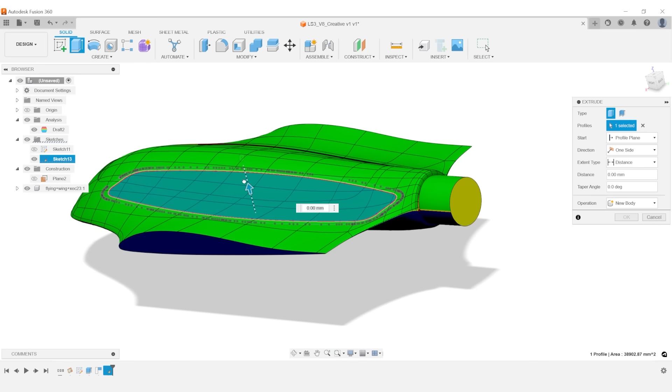Today, we're moving away from our normal hands-on approach to focus on design, specifically on how to design in the necessary features into your patterns to go on to produce molds for successful composite parts. By the end of this video, you're going to have a good understanding of trim allowance, mold flanges and returns, where to locate parting lines, and how to add in other features such as integrating mold clamping bushes in multi-piece

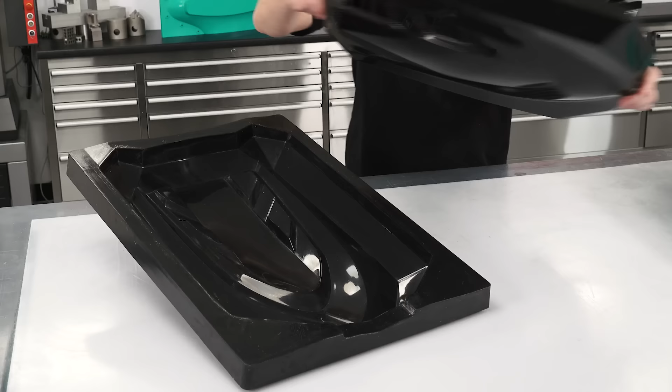molds. Before we jump onto the computer though, let's go over some of the fundamentals to make sure that we're all on the same page. So let's say that this carbon fibre engine cover is the final part that you want to create. In order to make this, you're going to need a mould. This is the mould for the part, and as you can see, if we drop that in, this component has been formed in this mould.

Now, in order to make the mould, we essentially need another mould, and that's what we've got here. This is the pattern. This has been CNC machined from epoxy model board, and if I loosely drop the component over the top of this, you see we've got exactly the same shape, but we have a lot of additional material and features, and it's the design of these features that will be the focus of this video.

We have these blanked off areas where we've got apertures. This would be the same if these were drilled holes, and then if you look around the perimeter, we do have a slight extension that runs all the way around the outside. This is what's known as trim allowance. It simply allows you to mold the component oversized and gives you the room to accurately trim it down to final dimension. Beyond the trim allowance, we have the mold flange.

This is there to stiffen the mold and also means that any excess material will easily release from it. And then in the case of this mold, we've also got an optional return as well, and this just further stiffens the mold up. So that about covers all of the features that you're likely to see in a simple one-piece mold. We will be looking at much more complicated split molds shortly, but before that, let's jump onto the computer and design in some of these features.

This video is not intended as a CAD modelling tutorial, and so it does assume that you've got some prior CAD experience. If you haven't, then there is loads of information out there to get you started. The software I'm going to be using is Fusion 360. The sole reason for this is I know that this is the package that a lot of you out there are already using and already familiar with. But as I'm only going to be using very generic tools and methods, everything you see me doing would be applicable to any engineering CAD software, whether that's Catia, Solidworks, Onshape, anything like that.

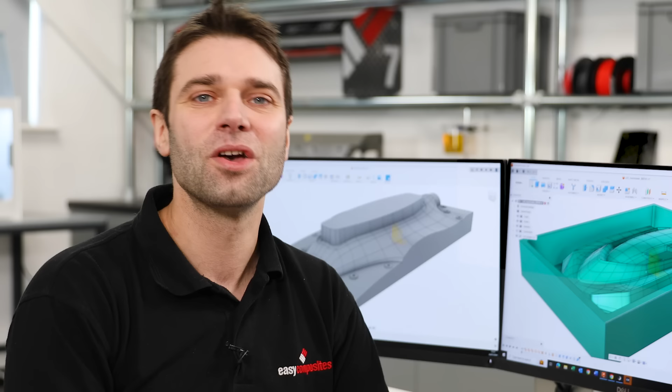One more thing that's worth mentioning is that some CAD packages will have inbuilt functionality or extensions for mold design. Now these are primarily going to be targeted at injection mold tooling, and so they don't really translate that well to pattern making in composites. But if you do have access to them, by all means experiment with the functionality, as sometimes you will find that they'll offer shortcuts into things like defining your parting lines. More often than not though, I find myself manually designing these elements in anyway. So let's get started and open up our file.

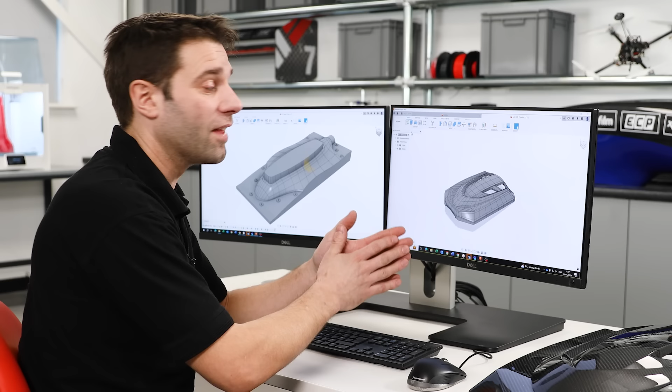So the file type that I'm opening up here is a step file. That's quite typical of the sort of file that you would be sent by a customer. But of course, if you've modeled it natively in the software, then obviously work from that fully featured model. So this is the model of the engine cover. The thing that I want to do now is establish whether this is going to release effectively from a mold. So we're going to consider the draft angle. In composites, any draft angle over 2 degrees is not going to cause any problems to release at all. Now, for small areas, you can go steeper than this, almost down to 0 degrees, particularly on like the edge of a tube molding.

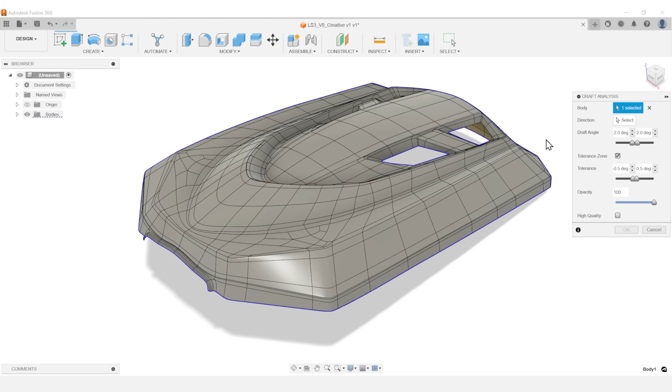So what we'll do now is go on the Inspect tab, select Draft Analysis, select our body, and then choose the direction that we will be pulling the part out in. So we're going to select the Z plane here, as that's the direction that we'll be likely pulling. So to get our draft angle set here, we're going to set 2 degrees and 2 in the draft angle. Then we're going to have a tolerance of 0.5 and 0.5.

And what this is going to do is highlight any areas that are less than 0.5 in red. They're likely to be problematic areas. Any areas that are less than ideal in yellow, and then any areas that are perfectly fine in green. Now we can't really see much on this because this model actually has very generous draft.

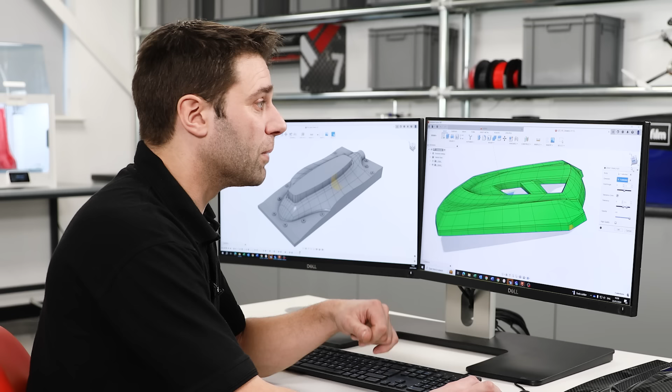You'll see a small area of yellow just in this area here, and that might be down to the orientation of the model. But if we were to change the direction of pull to, say, the side one here, not that we would ever try and pull it out of the mold there, you can see more clearly what that would look like. So we'll now set that direction back onto our Z-axis and click OK. Our draft analysis is still in place here.

We've got those small problematic areas at the side, but if we just take a side view, we can see that this model has quite a steep angle to it, and we can level this out, and this is going to do two things. One is it's likely to fix that small area of draft that we've got there, and the second thing is that it's going to use less material in the pattern, so we're going to just flatten that out.

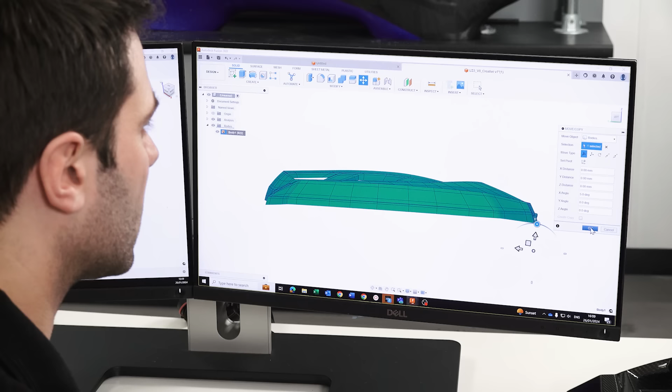So we'll just select the body and move that round, just setting the angle round to bring it in level. 5 degrees, if I just cheat and use the bottom edge, that looks about right to me and approximately level, so we'll just click OK on that. And then if we now just pan around the model, we can see that we've now got no undercuts showing on that draft analysis.

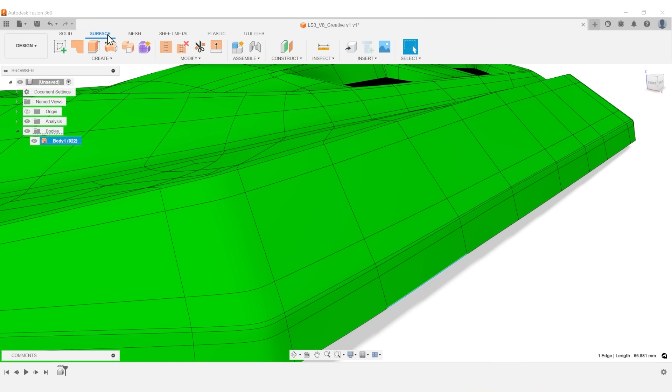With everything set up, we can now go on and model in our first feature. That's going to be the trim allowance, or the extension that runs all the way around the perimeter of the part. So I'll just move in here and select one of these edges, and then in the surface tools I'm going to create a ruled edge. On the edges that I've got selected, I'll just select 2 or 3 of those, and then change the type to direction, and then set the direction as the Z plane, so they're just drawing straight down.

In terms of the length of this extension, for pre-pregs this could be really anywhere between 3 and 10 millimeters. But for hand layup or resin infusion molds, you might want this to be quite significantly larger. So I'll just set that to -4 millimeters, and then I also want to add in a draft angle.

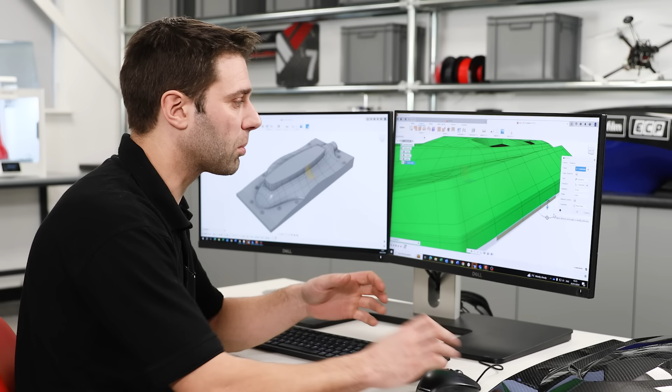I'm going to put in a draft angle of about -5 degrees here, and that's just going to kick those flanges out, which means that they won't have a problem. Otherwise, if we just drew them straight down, we would have parallel sides, which we know would be a problem for release. So I'll now continue on and just select all of the edges on one side of the component. I only need to model these on one side as this part has symmetry, and so I can save a little time by mirroring these features over later.

With the trim allowance modelled in, we can now move on and put the flanges onto the mould. Now for a pre-preg mould, these flanges can be just 50 millimeters around the perimeter, but for a resin infusion, this could be 100 or maybe even 150 millimeters to allow you the room for your sealant tape and vacuum bagging consumables. To model these in, we're going to create another ruled edge.

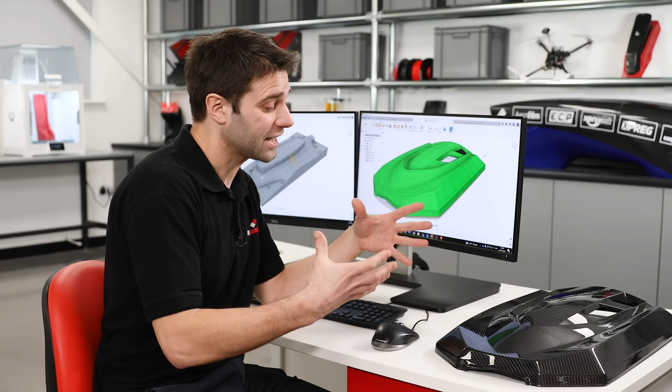And the first thing you need to do is determine what you see as the side of a component. And in this case, I'm going to be running this full length of the part and draw my flange out from there, and then I'll select this area as the front, and likewise the same thing at the back. So I've selected all of the edges down that side, and then we're going to create another ruled edge.

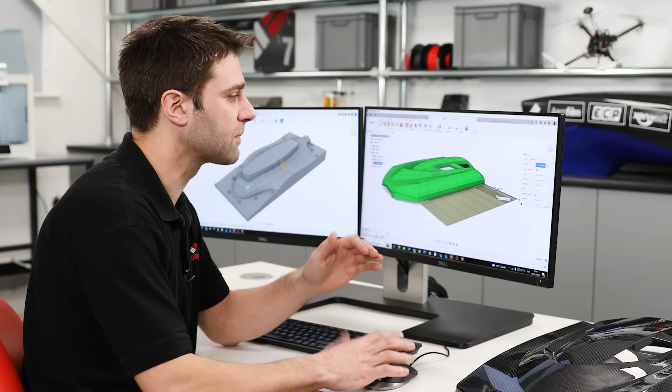And this time we're going to set our direction to the x-axis, and we've got 0 degree angle because these want to be coming out completely parallel. So in terms of the extension distance, 200 millimeters is more than enough. You can't do these too big at this stage because we are going to trim them back to size later. So oversizing them generally will be advantageous. So we're now going to continue and do the front and back.

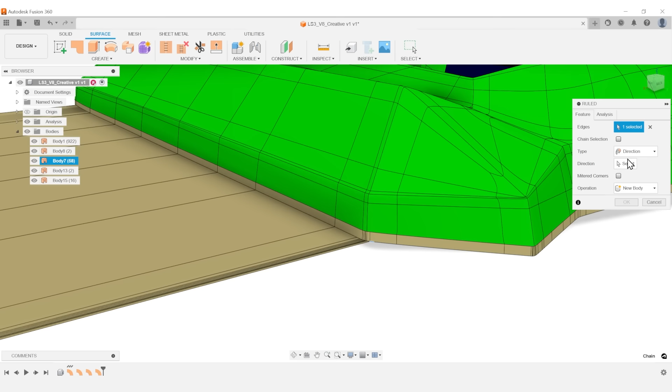So on the rear here, if we just go in and select an edge right next to it, it's very important that you do come right to that corner to meet the other side. So with those edges selected, we're going to create another ruled edge, and this time the direction is going to be the y-axis. And you can see that now that's extended, we've got the back of the part coming straight out from the back here. So I'll continue on and just get all of these edges selected. And then finally, we're just going to do exactly the same thing on the front.

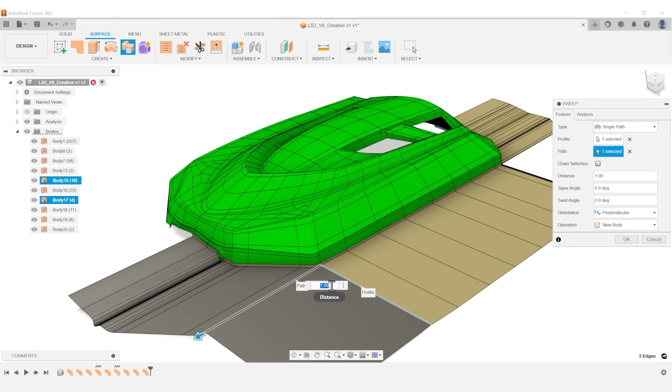So we now have the extensions for the flanges out of the front, back and side of the component. All we need to do now is fill in these corners. That's really straightforward. All we need to do is select the edge, and then in the surface modeling tools, select sweep, and then for the path, select the other edge that you've got. It doesn't matter which order you do these in, the end result will be exactly the same.

So we'll do that in that corner, and then we'll do the same thing on the back here. So we'll select sweep, one of the edges, select our path to be one of the other edges, and click OK. We now have the flange features for one side of our component, and we're going to mirror these over to the other side.

Before I do that, I'm going to get all of these surfaces stitched together so it just becomes one body. So we select the stitch tool, and then select all of our faces and stitch them together. 0.5 millimeter tolerance would be fine on that, and click OK.

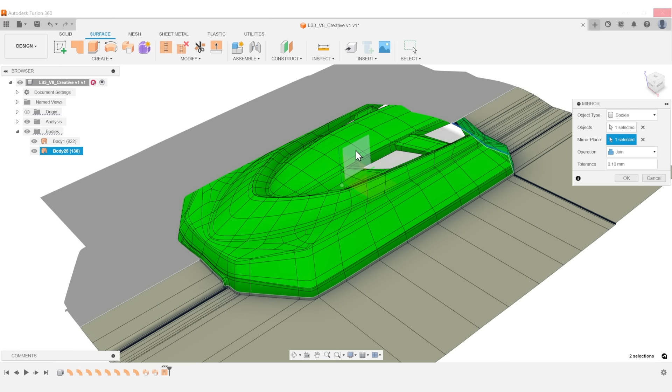Now that the surfaces are stitched together, we can simply mirror that over onto the other side. So we will select mirror, then our body, and then we'll use the X-plane as the mirror plane and click OK. So we now have all of those features around the part.

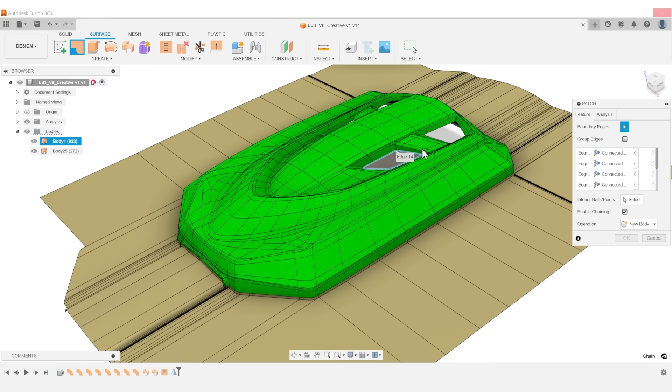The next thing that we're going to look at is blanking off the apertures that we have in the top of the part here. And this technique would be exactly the same if you had drilled holes in a component, which you will commonly find. So we're going to use the surface tools again, and then select patch, and then select the areas that we want to patch in. Just select that edge, it'll chain select the whole thing, and then we just click OK, and we have blanked those off.

That's all of the fundamental features for a pattern modelled in. So we've got our trim allowance, our mould extension, and we've blanked off any features. So we can now use these surfaces to cut into some stock material that could be used to then create a pattern. To do that, we're going to need to stitch all of these surfaces together to create one single body. So we'll just select stitch, then all of the bodies that we've got there, and click OK.

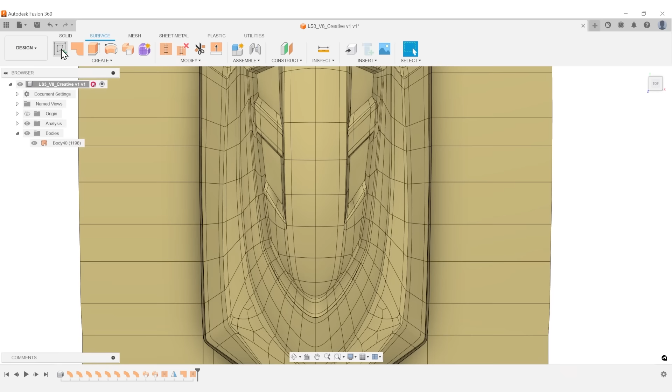Now we're going to model in the stock material around this part. So we'll create a sketch in the top plane and draw a rectangle around this that's going to represent the stock material. So whatever size this is going to be will really dictate the size that the flanges will be on the component. In the case of this part, I want sort of 30 millimeters or so. So we'll just dimension these in at 230 millimeters. And here we'll go to 330.

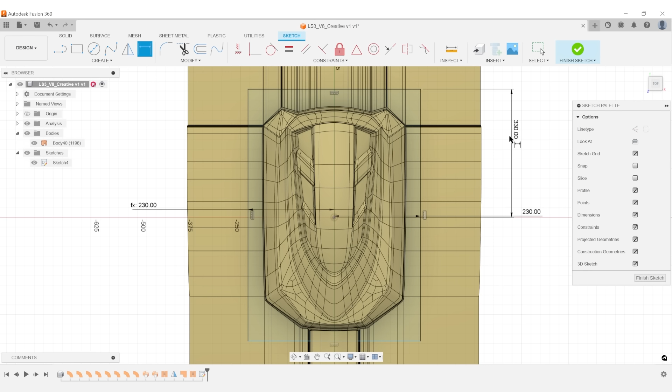And we'll now extrude this out as a solid. So if we just come around to this plane here, we want to basically just bury our component just inside our stock material without excessive wastage.

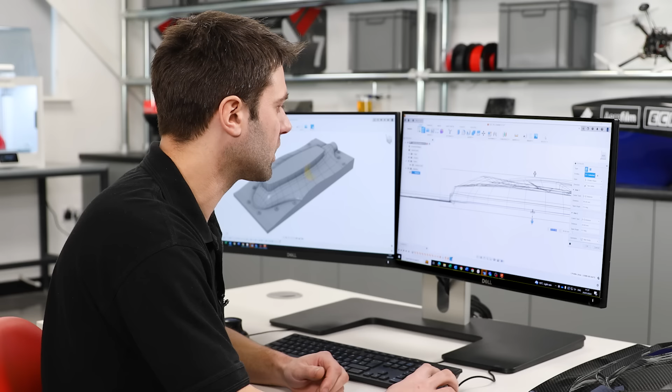It can be quite useful to just change your style to wireframe here, just so you can actually get a visual on what's happening. So we just need the component just underneath the top edge of the stock there, and we can see at the bottom we still haven't completely buried it there, so we will extend out on two sides and draw on material underneath, leaving us enough stock there to give us some stability whilst machining. So we'll click OK on that. We'll return to our normal visual style.

And now you can see our tool is running through the middle of that stock material. So now I'm going to use that tool to cut into that block. So we'll use split body, select the stock as our body and the tool as the surfaces that we've created earlier, and click OK.

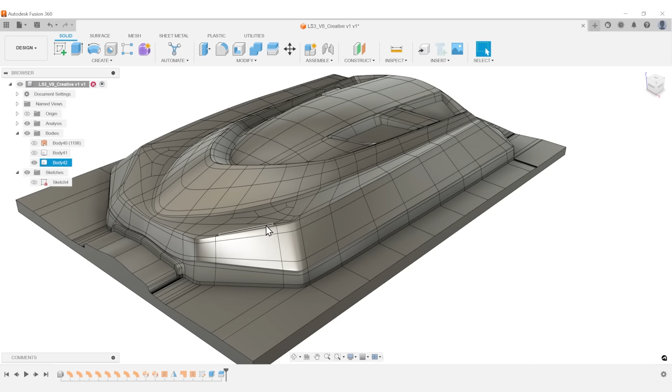Right, so now if we hide our original surfaces and hide that other section of the split body, you can see that we now have our finished pattern shape, and that could certainly be machined as it is and used to create a mould. But I'm actually going to add in an additional feature. I'm going to put a return flange all the way around the perimeter of the main flange. And the reason for this is it just adds further strength and stiffness to the mould.

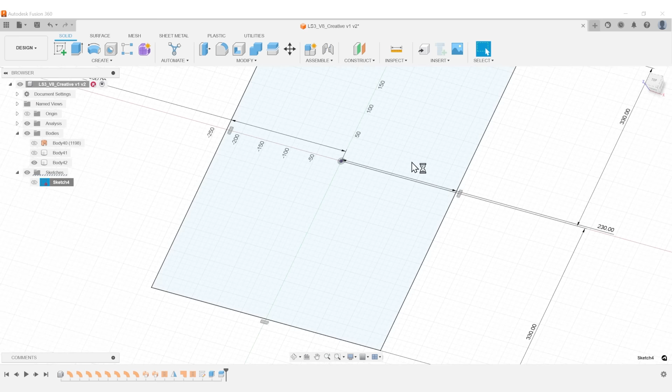To do that, I'm just going to edit the original sketch that I used to draw the stock. And then in here, I'm just going to add a perimeter around the outside by creating an offset of -25 on the outside. And then I'm also just going to put an offset on the inside, which will allow me to put a draft onto it, and you'll see that shortly. And then from here, we can now extrude.

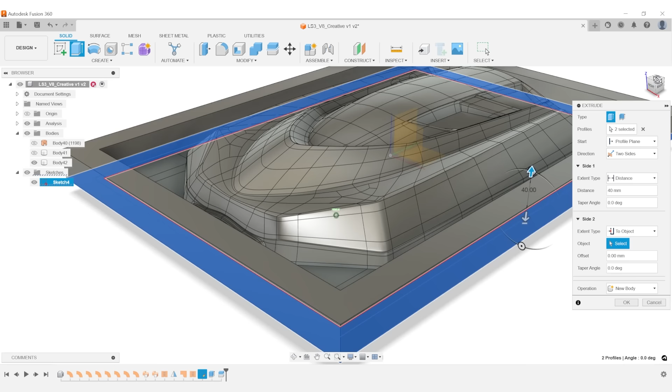So we're just going to select the profiles that we've just put into the sketch. We'll extrude that a distance of around 40 millimeters. And then we'll also set it to extrude in two directions, so we come down to the base here. So just select that object, create a new body, and click OK. So we now have a perimeter flange all the way around the pattern.

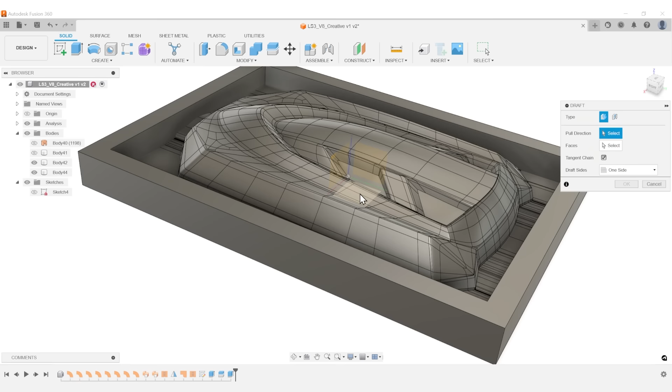But what we have here is vertical surfaces, so we actually want to put a draft onto those. So we'll just use the draft tool, so modify, draft, select our pull direction, which is going to be the Z-axis, and then the faces that we want to put the draft onto, and we'll set a 5-degree draft angle onto those to make sure that we have no problems with the release.

So we'll click OK, and then we'll combine these two bodies together to make them one piece. So that's our target body and our tool, combine, and so now we have a single body. The final thing I'm going to do here is just add some fillets into the corners. That's just because the tool wouldn't be able to access these sharp corners here. So we'll add a fillet in there. We'll put the fillets in at 10 millimeters.

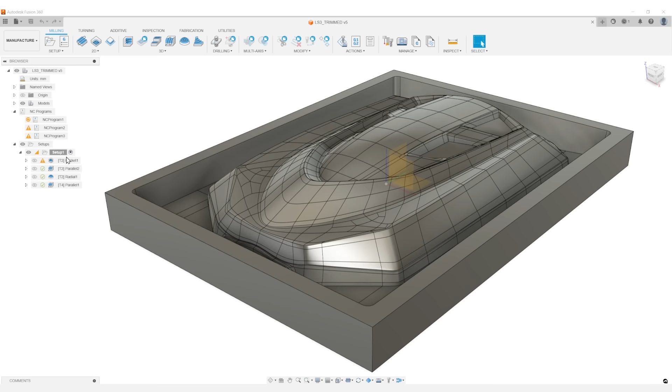For this video, that's as far as we're going to take this component. The next steps would be to generate toolpaths and get this loaded onto a 3-axis CNC to be machined out of EB700 epoxy tooling board. Typically, the pattern would then be hand finished and sealed with S120 board sealer, which is then flatted out and polished before release agent is applied.

The mould can then be laminated using surface and backing plies of Xpreg XT135 tooling prepreg, vacuum bagged and oven cured. Once cool, the mould can then be removed from the pattern, release coated and is ready to be put into service. And of course those moulds can then go on to produce parts like this. But we're now going to look at a more complicated example where we're trying to put in multi-piece split moulds. So let's take a look at that.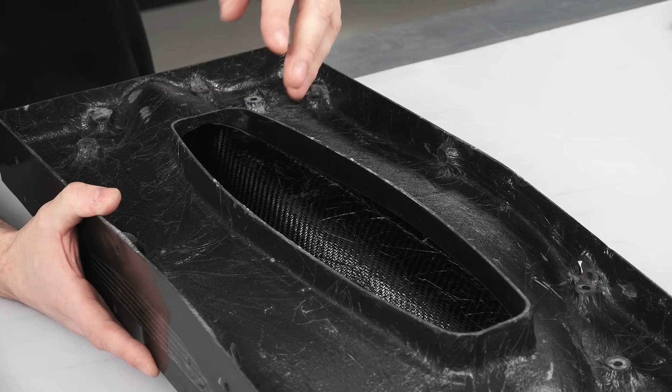And then in the upper mould, we also have this large aperture where the hatch is on the fuselage, and this just lets us get the vacuum bag into the component. Another feature of these is that we actually mould the wing roots at the same time. And to do that, we've got 90-degree flanges on these moulds, and then loose shuttering or loose tooling can be attached onto that to create that section of the mould.

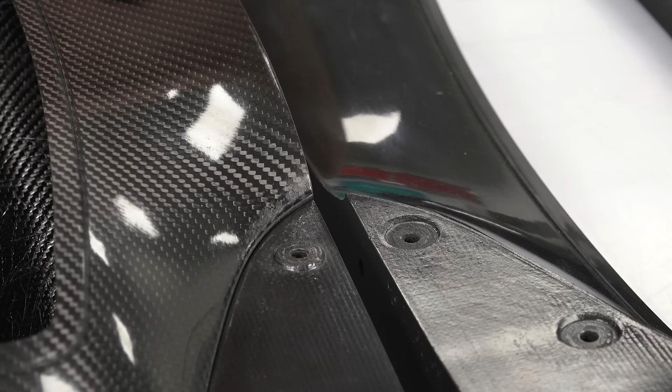Another feature of these moulds is their use of MB6 mould clamping bushes. These metal inserts allow the mould sections to be accurately aligned and securely clamped together. In order to put these in on curved flanges like we have here, you will need to have flat areas. So we've got a male and female area on the moulds here, so we will need to machine those into the patterns. So if we look at the patterns then,

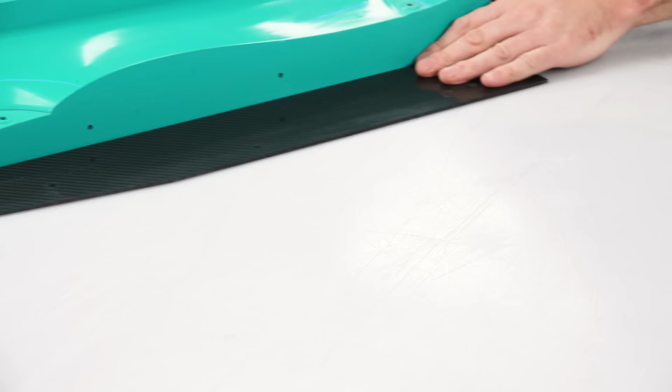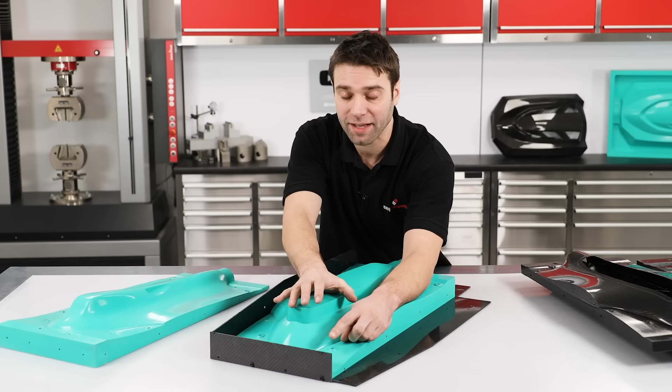Another feature you can see clearly on these are the flat areas for the MB6 bushes. This is the male one in the pattern, which forms the female element on the mould, and then we've got its counterpart on the other pattern. We also have the flange around the aperture machined in. We can do it in this instance as we can afford a bit of draft angle on that. So let's jump back into CAD and get some of these features designed in.

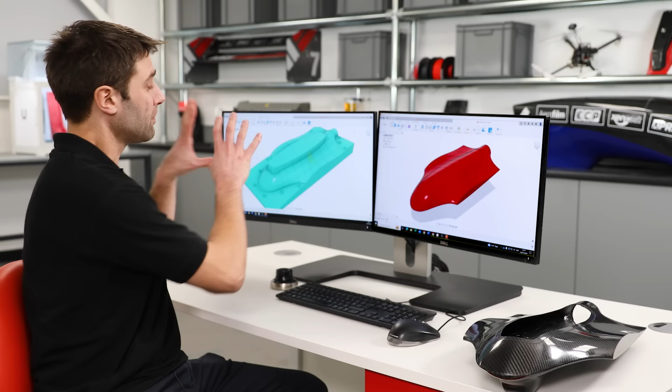I already have the CAD model open here for the fuselage, and I've also opened up the model of the pattern. This is just going to be useful to cross-reference as we're going along. The first feature that I'm going to model in here is going to be the extension that we've got behind the motor mount that creates that aperture you've just seen in the mould.

To do that, I'm going to first create a plane between 3 points on the back edge. So those 3 points will give me a flat surface to work from. Then I'm going to create a sketch onto there. In the sketch, I'm just going to best fit a circle onto the rear edge here. You don't have to be incredibly precise with this. And then we're going to extrude that.

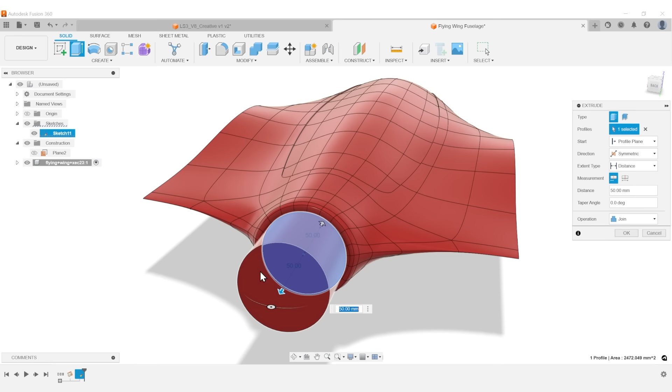We'll be joining it into the rest of the body, and we'll just draw it out 50 millimeters out of the back, and we'll make that symmetric so it also fully joins into the rest of the component. Okay, so that's that feature added. What we're now going to do is do a draft analysis to look at where the parting line is and whether we have any problems with our geometry.

So as we did before, we'll select draft analysis, we'll select the body that we want to look at, the direction, and then the tolerances that we want to work to. So again, it's 0, 0.5, 0, and 2.5. So we can see just at the back edge here, we've got quite an ugly feature here. Theoretically, this red line should represent where the parting line is, but in this case, the parting line would have to come up here, it would get broken, and then drop back down this edge.

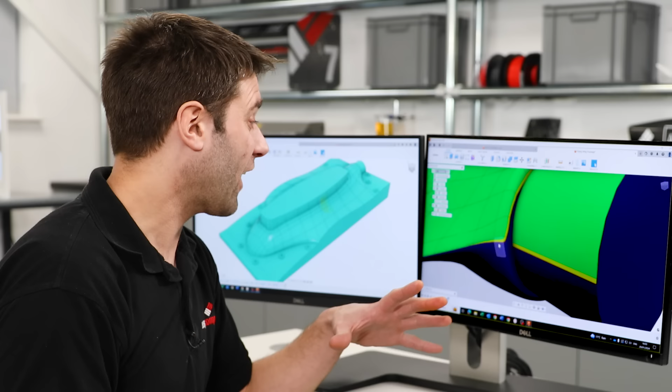Now, that is going to be problematic. There's no way that you could actually machine the parting line to follow that. We could choose to ignore it, but then we're likely to have an undercut. So let's just see whether we can play around with the orientation of the model and get that improved. So we will just select the body we want to work on and move it and just play about with the angle. So at 5 degrees, kicking it forward, you can see straight away it does look better.

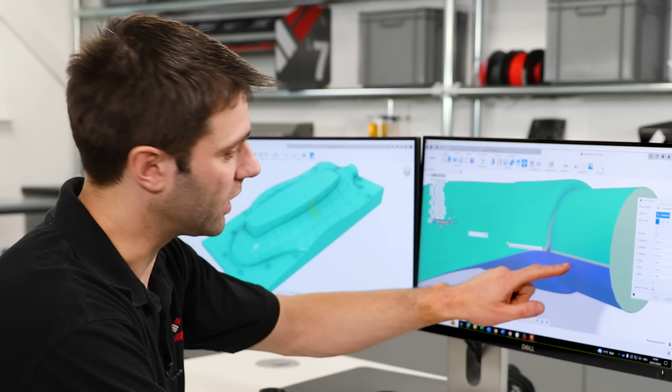Let's see what something like 3 degrees would look like. Now again, we've got quite an ugly area on the line here. So let's go back to 5 degrees. We're going slightly now underneath, so maybe there's a happy spot at about 4 degrees. Yeah, so you can see now that our parting line is coming in quite cleanly. You're never going to get something like this absolutely perfect, but this would certainly be workable at that.

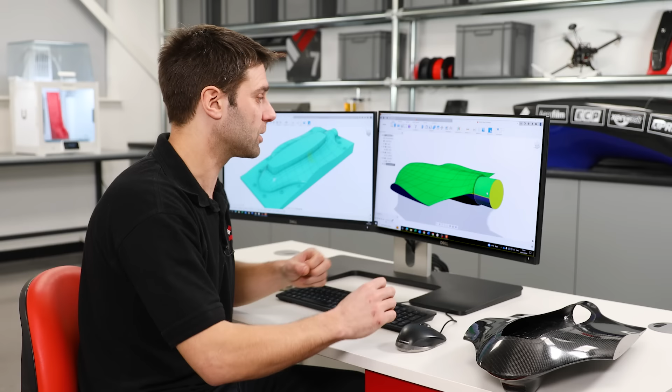It might be 3.75. That's probably even better still. So if we zoom in here, you can see that we're at the midpoint right the way through there. So that would be a good location for the parting line. Okay, so that's our orientation. We now want to add in the feature on the hatch that gives us that return, which is the aperture that goes into the mold. So on the pattern here, we're looking at this section.

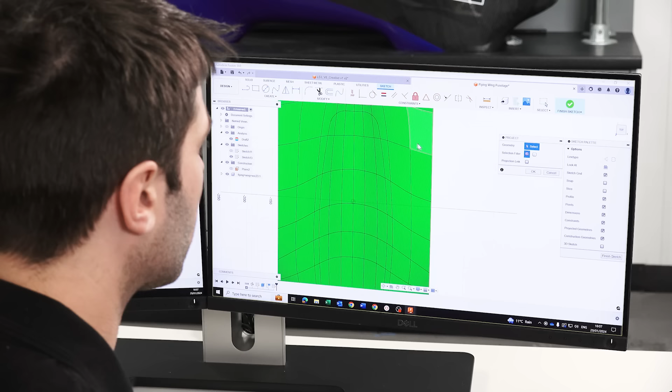To do that, we're going to need to project some of the geometry from this slight rebate that we have around the edge of the part. This rebate is to allow a hatch to drop in. So we'll create another sketch. We'll do it on the top plane. We'll capture our position. And then we will project our geometry. So then we'll select for the geometry the edge of the rebate all the way around.

And we click OK. Now that we've got the projected features, we're just going to create an offset of these. So we're going to offset that around about 8mm inwards, and you can see that that's just giving us that line on the inside that's smaller than the hatch. And that just allows for that extra bit of rebate that we do have on the part here. So we'll click OK, and then we can extrude that feature.

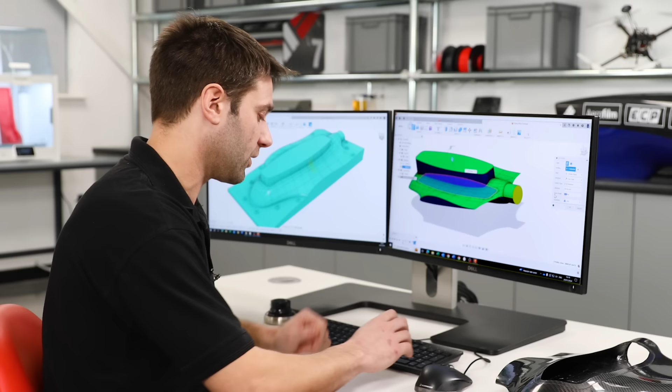So we'll take that and pull it through our component. We then want to join, and we also want to put a taper angle because we can't have parallel sides, because again that's going to cause us issues for release. So onto that we'll stick a -5 degree taper. There we are, and you can see straight away in the draft analysis that it looks absolutely fine. So this doesn't need to be quite as high as we've gone there. Something like that should be absolutely fine. In fact, let's just go to 70mm. Perfect.

We're now ready to actually put in the parting line. As I mentioned earlier, some CAD packages will do this for you automatically or project that line onto it. But even if you have to do it manually like you do in Fusion, it's relatively straightforward. So we'll just take a side view here, and we can use our draft analysis as a reference for where that parting line is going to run.

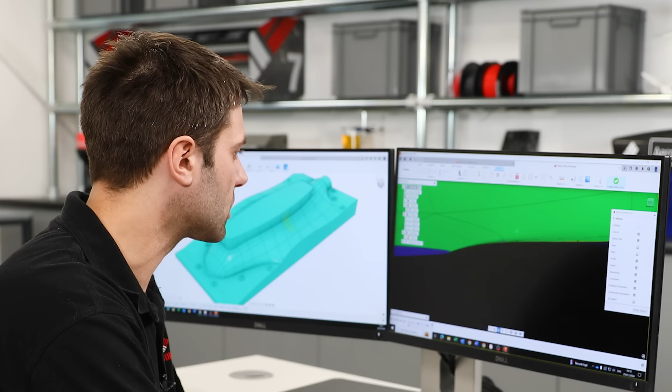So we'll run a sketch in this plane, and starting out at the trailing edge, we'll run a line as close in on that parting line as we can get to. I generally find for parting lines like this, a spline tool is pretty easy to use, and just chase that line as closely as you can. As soon as you get off a curve, like we have done here, click OK,

and then we will do the same thing and form a spline on the front edge. And just go through and adjust them as necessary until you're happy with their location. Then we'll just run that parting line through the centre there. And then we'll also extend out from the ends to create a flange detail.

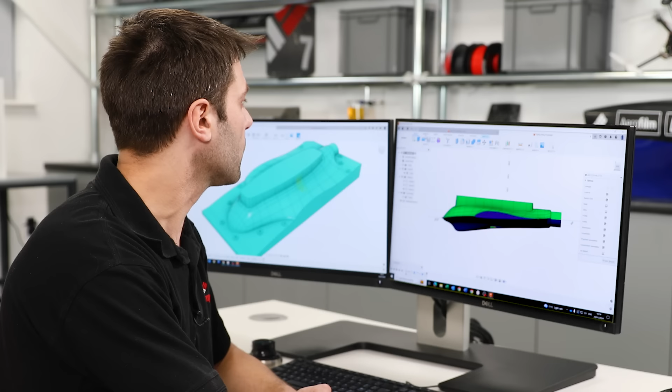That's the parting line defined, and we can now draw a surface through where the parting line is going to sit. So we just go onto the surface tools, extrude, and select that line. And from there, we can just pull the parting line across. So we're going to do that symmetric, so it runs out both sides, and we're going to go just through to the edge of the component.

We're now at the point with all of the features added that we can start modelling up the stock material. So we'll do a sketch on the top plane and just draw a rectangle around the edge of the component. So just nominally put that in. We'll align these edges. Then we'll just bring the dimensions in here to a nice round number as it makes cutting the stock that bit easier.

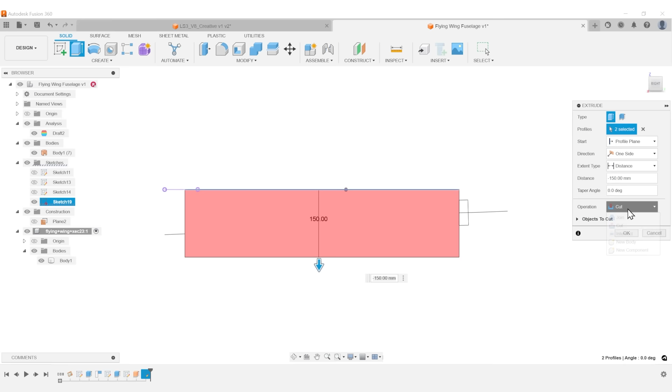Okay, so we'll now use this sketch to create an extrusion through our component to represent the stock. If we just switch over into wireframe, it's going to make that a bit easier to see, and we're going to be creating a new body, and we'll just draw it through the component like so. And we just need to fully encapsulate the part here. And that looks good to me. The stock now completely encapsulates our model.

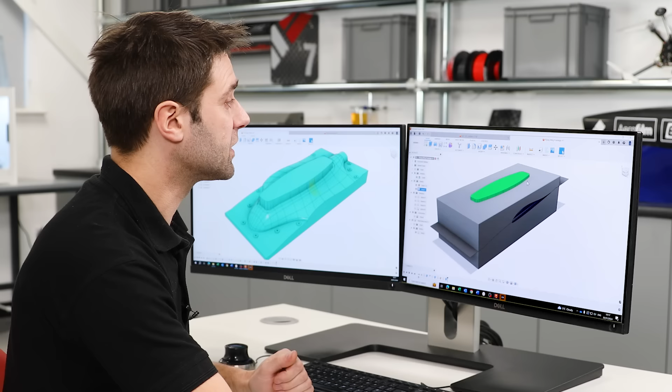What we're going to do now is split that stock down the parting line using the surface that we created earlier. So we'll use split body. We're going to select that as our body to split our stock, and then the splitting tools, we're going to use that parting line surface. So we'll just click OK on that, and now we have two separate components. So you can see already that this is starting to look like the pattern with all of its features.

So the next thing that we're going to do is actually subtract that model from that stock material, effectively creating the mold cavity that we want. So we'll use the combine tool, we'll select cut, our target body is one of the pieces of stock material, and then the tool body is the model itself. We're also going to select keep tools, as that means that we don't lose that model in this operation. Click OK, and then we're going to repeat the exact same process with the lower piece of stock.

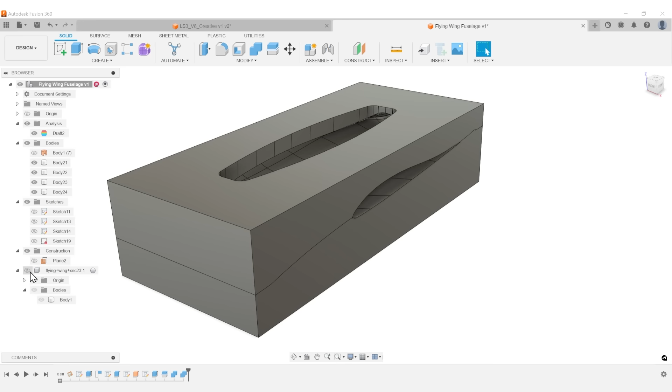Now, if I hide the model itself, we have effectively the mold that we're looking to produce. So that's our full mold cavity, and we have the two individual components. Also notice that I've got an extra couple of bodies created here. I was only expecting two, so let's take a quick look at what we've got there. I can see those straight away. We've just got these additional bits. That's where the parting line has come through and actually cut into the other side of the tool.

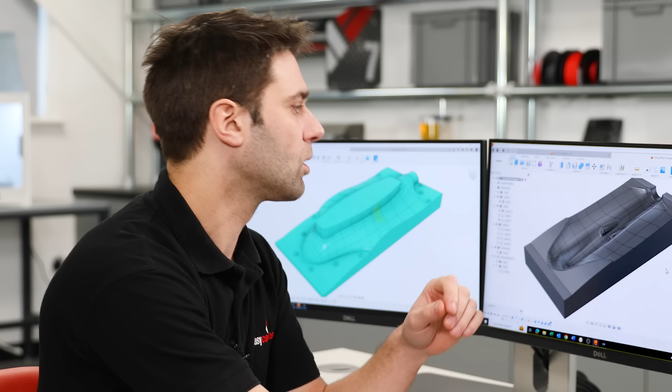So what we're going to do is just join those back down onto the original part. So all we need to do to fix that is just select those bodies and combine them, join operation, and this time we don't need to keep those tools. Click OK, and we now have that as a single body. We now have what is basically the two mold halves modelled up. The next thing that we need to consider is how to accurately align and clamp these sections together. To do that, we're going to be using the MB6 mold clamping bushes.

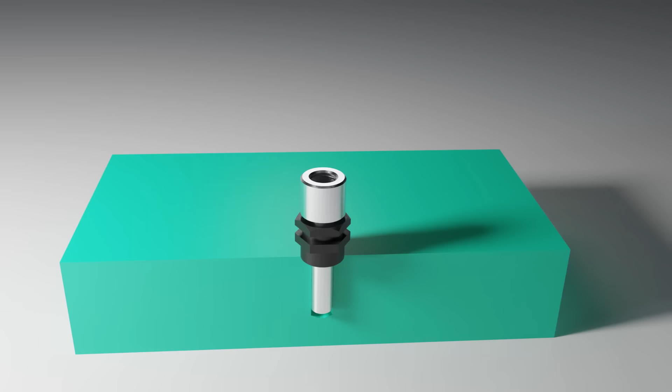The way that these work is they are located onto a drilled hole in the pattern using an extractable dowel pin. The bushes are then laminated around during the mold making process, which encapsulates the bush and provides a perfectly aligned and hard-wearing bolt location to allow the mold sections to be clamped together.

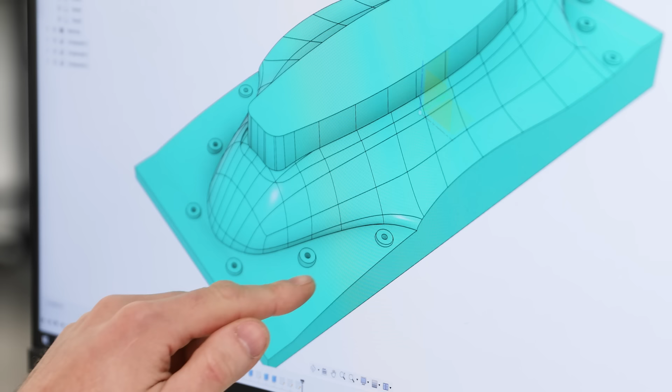Now, because we're 3-axis machining, and so any holes that we bore into the pattern will be vertical, we do need to make sure that we've got a flat perpendicular plane underneath the bush so that it's not sitting on an angle, effectively not making full contact with the surface of the pattern. And the way that looks, if we look on this model, is a small round plateau on any of the angled areas. Now, if you do have any flat sections of mold, it's no problem. You don't need to add these features in that instance. It's just when your bush would otherwise be sitting on a sloped section of the pattern.

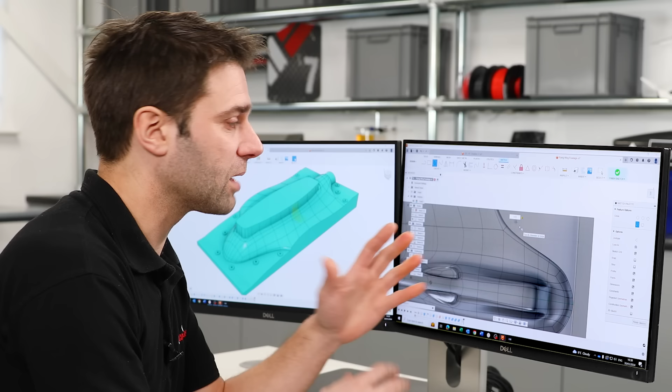So we'll start to sketch on the top plane, and then I'm going to draw in a 6.1mm hole, and that's going to be for where the dowel pins will be located. Now, 6.1mm is generally going to give you the best fit for a dowel pin, but it is worth experimenting on a bit of scrap material if you are going to be machining these to make sure that you've got a nice, tight, close fit onto your dowels. Sometimes, depending on your machining strategy and your particular tool selection, it can vary a little bit, but I find 6.1mm is normally where you want to be.

Along with that one, we're going to add in another circle onto here at 18mm, and that's going to create that flat plateaued area. So in terms of location on these, you don't have to be incredibly precise with it. You can pretty much do this by eye. You're looking to get them fairly close in onto the edge of the pattern, within around 20-25 millimeters, as that's going to ensure that that edge itself does clamp very, very tightly. In terms of spacing, that's really going to depend on what your particular molds are likely to require in terms of accuracy for alignment. I would normally say for a part like this, anywhere between 75 millimeters and 100 millimeter spacing is fine.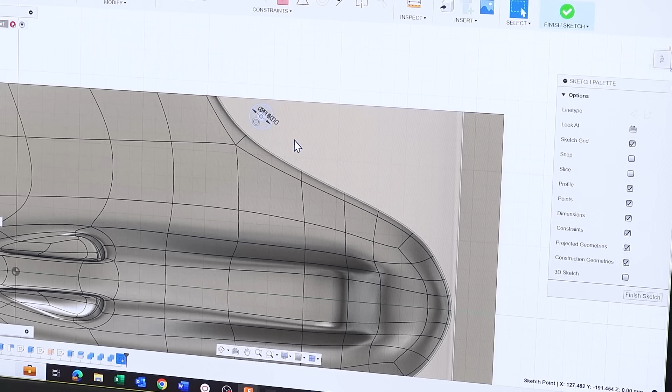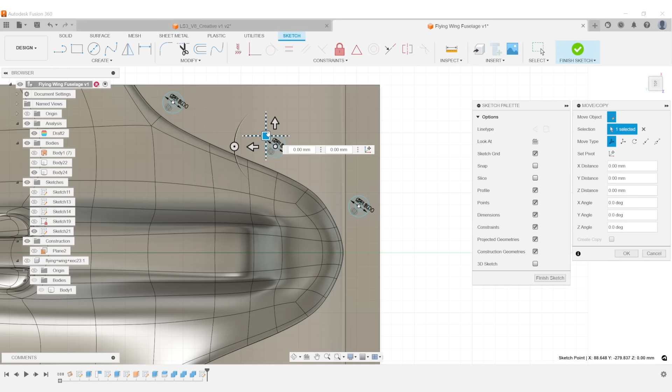I'm just going to locate 3 in each of the corners of this mold. So we'll just select that, and we'll just by eye place these in. Of course, if you did want to, you can go to town on this, you can dimension them all in, but generally just doing it by eye is going to be adequately accurate. I'm just running these on one side of the component because I'll just mirror these features later on. So we can now look at extruding these features into the mold surface that we have here. These need doing individually because they're all going to be done at different heights.

So we'll just go extrude, and we'll take both that and the hole and draw it down. Now, if we just take a side view on this, you can see that we've got quite a lot of height here. We want to bring this level down as close as we can to the surface here. You don't want them touching, so you just want to keep them slightly proud. So in this case, I'm just going to offset the distance here by, by the looks of it, 6 millimeters. No, let's try 4. That looks about right.

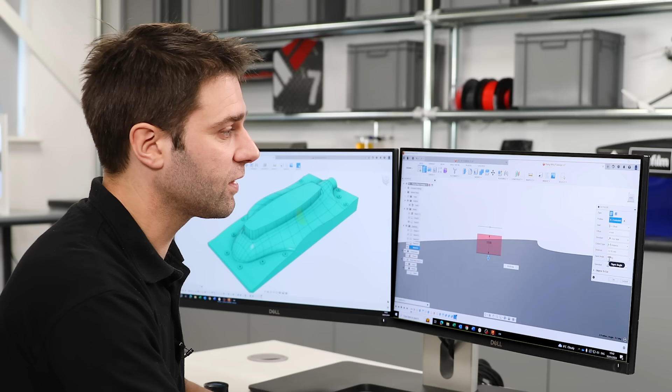And then the other thing we're going to do is put in a taper angle. Again, we don't want these to be locking into the molds, so we'll put quite a generous 30 degrees onto that. And then finally, we'll just select join. That's just added that feature into our mold. So we'll just continue on and do the same thing with the other ones here.

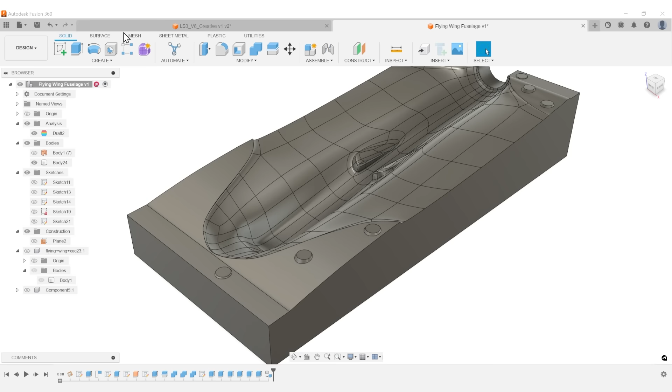We're now going to mirror these features over onto the other side of the mold. Before I do that, I am going to convert the other side of the mold, that body, into a component. For some reason, Fusion just likes to merge everything together if you do a mirror operation. So we'll now create a mirror. We'll use features. We'll select all of those extrusions that we've just done, and our mirror plane is the X-plane there, and click OK. So we now have all of those features in.

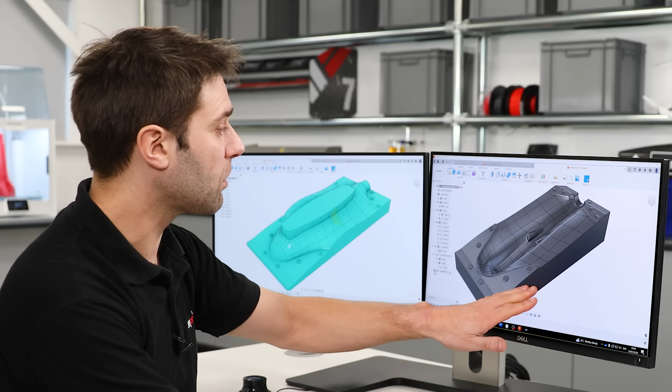What we're going to do now is add in the second half, or the upper half of the mold, and use this lower one to subtract from it. So we'll just go combine. We're using a cut tool. Our target body is the top tool here.

The tool body is the lower one, and we're going to keep tools so we don't lose that lower half of the mold. So we now have our upper half, which we've just modeled. And if we hide that, we now have the upper half with the female side of those features into it.

These features are currently size on size, meaning that those 30-degree tapers are exactly at the same diameter throughout. Now, you don't really want this, as any inaccuracy in your machining is going to mean that your molds are not going to accurately close and clamp together. So we are going to need to build in a little bit of free play, a little bit of tolerance

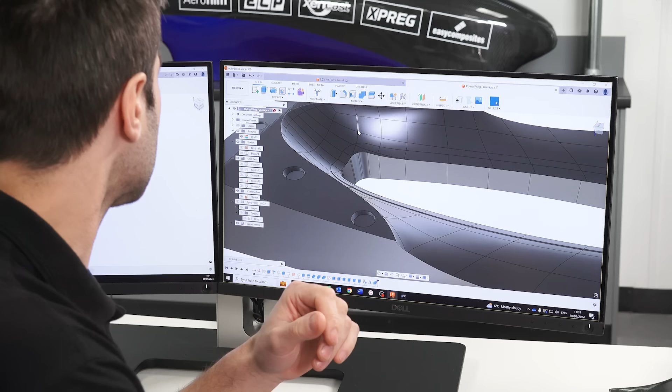into those sizes. So we'll go back to our lower section of the mold, and we're just going to use the press pull feature on the taper angle there. We're just going to remove 0.5 millimeters from it, and that's going to give us that little bit of extra tolerance that we need. So we'll just now go through and select all of the faces of those features.

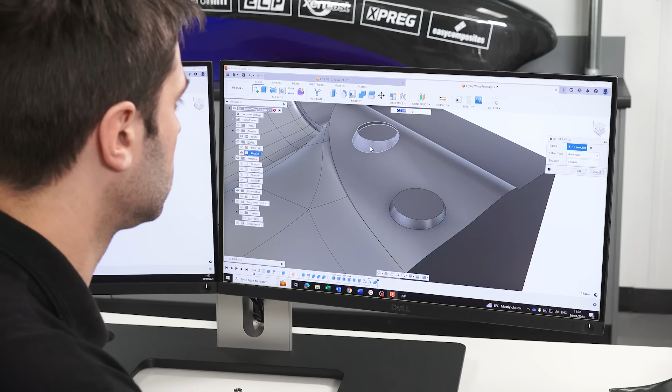What we have at this stage is a model of the mold, not of the pattern that we need to produce the mold. So to flip that over, all we need to do is extrude another piece of stock through this. So we'll just select the lower face there, and we will draw a piece of stock through our component, making sure that we've got enough material on the other side to make a stable pattern. So we'll just draw that out to about what we've got there. So we'll create a new body and select OK.

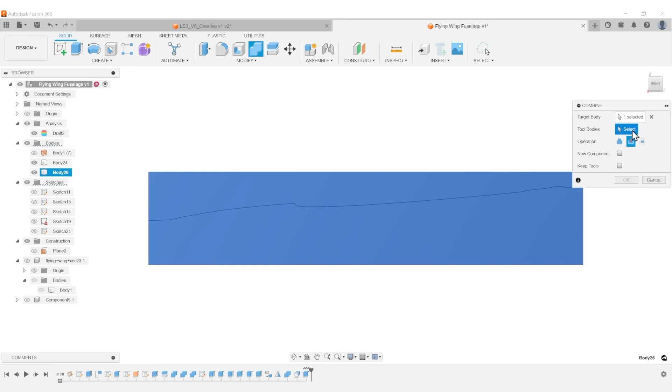Now we're going to use the combine tool again. We're going to use a cut. Our target body is that new piece of stock. Our tool body is our mold. And we now have a model of the pattern. So we'll do that again. This is the lower side of the mold. We'll just repeat that whole process for the upper side of the mold.

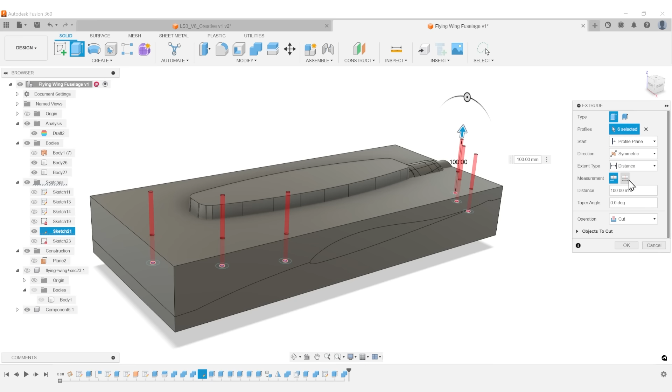The final thing that we need to do is add the bores for the dowel pins for the mould clamping bushes. So we'll bring up the sketch we drew earlier and we will extrude these through both patterns. And like we did before, just mirror that feature across onto the other side as well. So that's our fully featured patterns for producing our split moulds. These can now go on to be CNC machined.

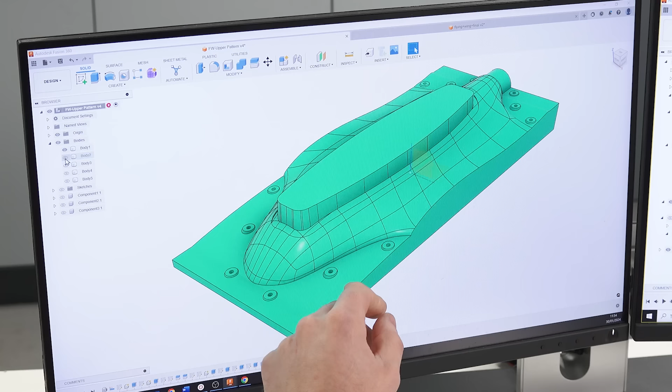One thing to remember about these particular patterns is that they will also feature some removable shuttering that's attached around the perimeter. Now if I show you on this example what that looks like, so we'll just add these in. And these are just carbon fibre plates that are going to get screwed onto the outside of the pattern. And these form the 90-degree return flange all the way around the outside of the mould.

Now it is theoretically possible to machine in these vertical features directly into the pattern, but as they don't have any draft angle, it's going to mean that the removal of your mould from the pattern will be almost impossible. So instead, these can be removed away from the outside and then the mould will easily release.

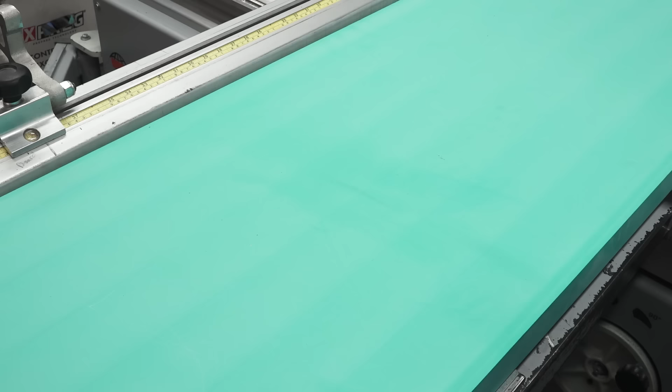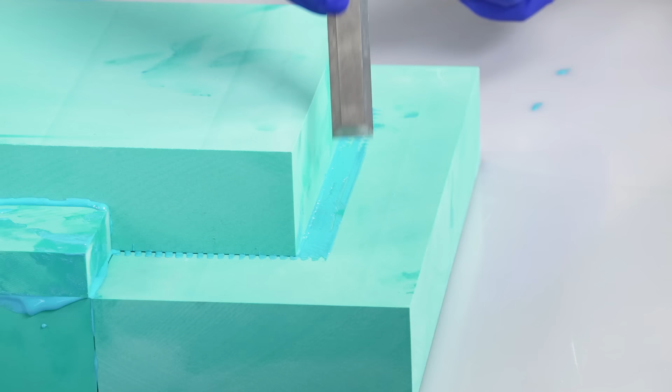The next stages for these patterns are to have the toolpaths generated in CAM software. In this instance, I'm using the inbuilt manufacturing facility in Fusion. The machining operation consists of a series of roughing and finishing strategies. In the real world, before machining, the epoxy tooling board can be blocked out into the rough shape of the pattern and bonded using its matching EA700 bonding paste. Doing this not only reduces cost and waste, but also the machining time, and is one of the practical aspects of tooling production that we'll cover in a separate tutorial.

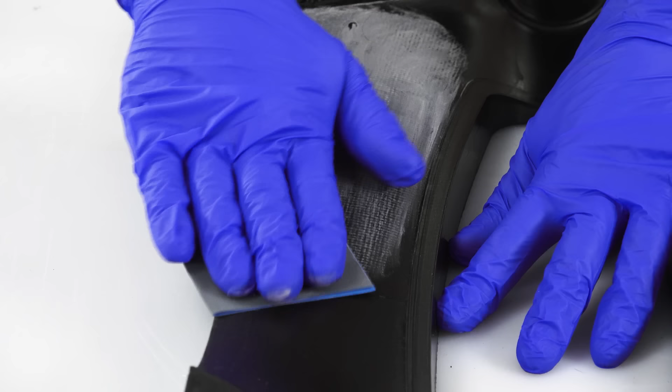The machining operation involves a few tool changes and takes several hours to complete. After this, any machining marks are then removed by hand. As with the single part mould, the pattern is then sealed with S120 board sealer before the moulds are laminated with the XT135 tooling prepreg. They're then vacuum bagged, oven cured, finished and release coated, ready for service. Hopefully that covers everything that you needed to know on designing patterns for composite moulds.